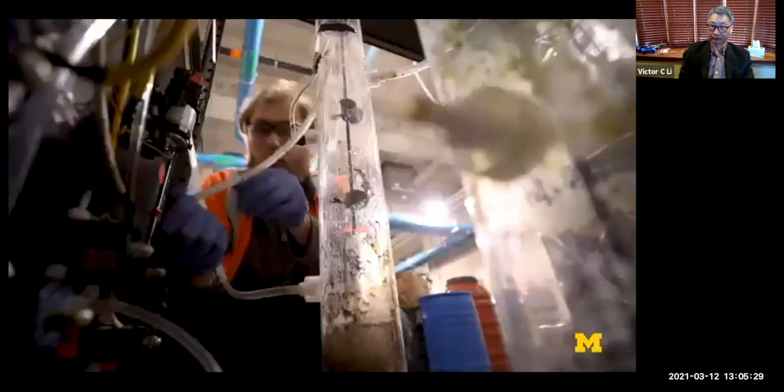Historically, we've pulled resources out of the earth, and then after we're done with the resources, we would release it back out to the environment. We started to realize that a lot of those wastes that we would release have valuable resources in them. Civil engineers and environmental engineers were designing a lot of those flows. I think we have a big role to play in how we might continue to shift the mindset and think about the future of what those flows might look like.

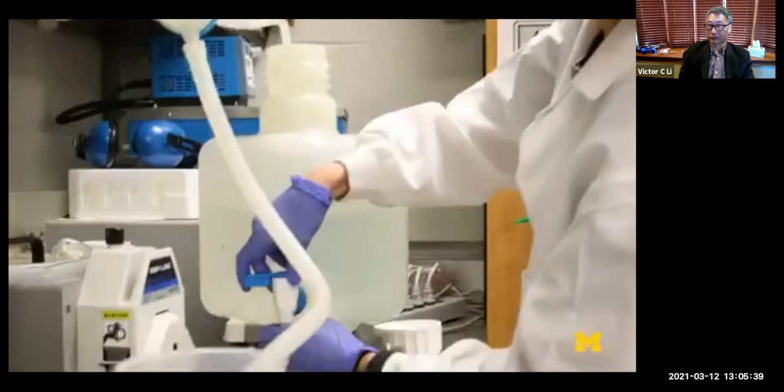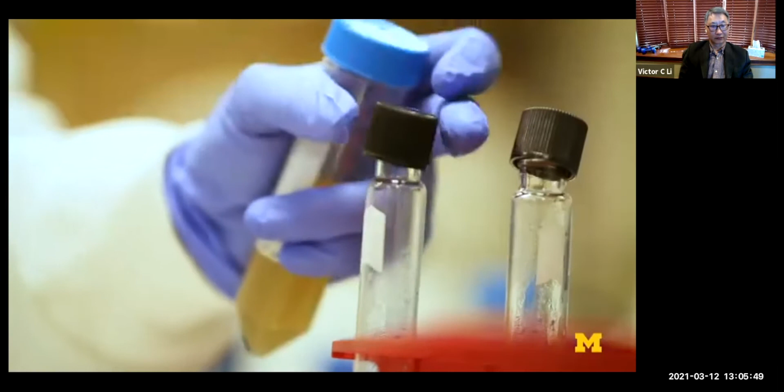One of the things I think we're doing that's really special is separating our wastewater right at the source, right at the toilet. The reason we're doing that is we can pull the nitrogen and the phosphorus out much easier before it's diluted in the wastewater, and then convert that nitrogen and phosphorus into really valuable fertilizer products.

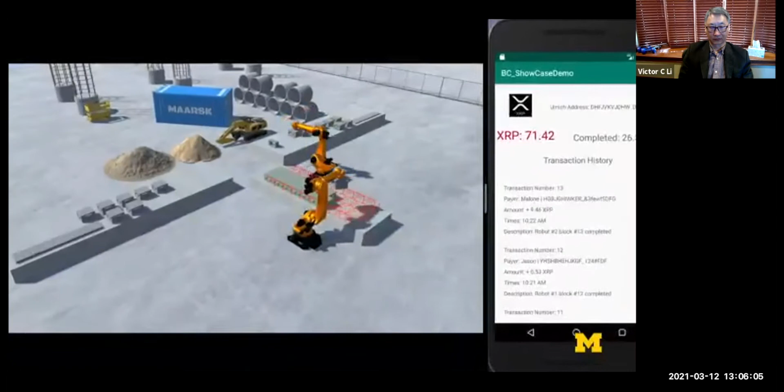Researchers in CEE are building RECO blocks. These are blocks built out of materials from carbon that's been sequestered, used to build structures. When the structures are done, rather than landfilling the material when we tear it down, we take those blocks and use them in new buildings, shaping the flows of these resources rather than a linear flow. We're making this a cyclical flow.

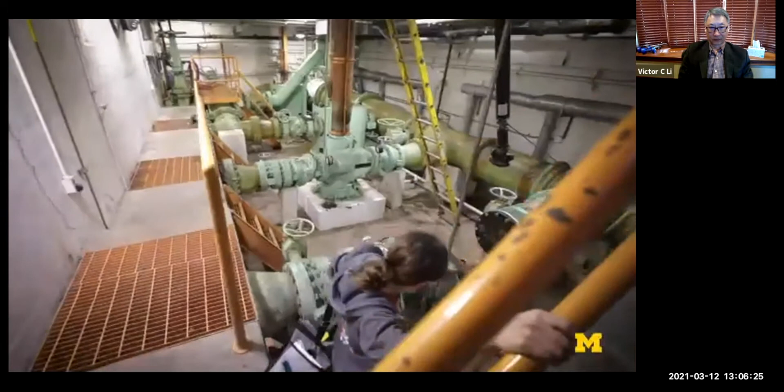In 50 years, if we're successful, this is just going to be in every activity we do as a civil and environmental engineer. How we're getting our resources, what we're doing with the resources, and where they go when we're done with them is going to be ingrained in our work.

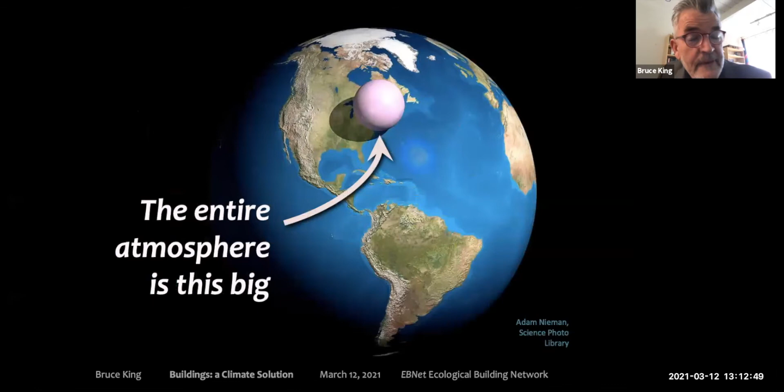This is how big our atmosphere is. If you scraped it all off the surface of the planet, it would be about this big - about 5-6 miles, about the distance from Battery Park to the middle of Central Park in New York. I'm sure there's something comparable near you. It's less than the distance across San Francisco, how thick the atmosphere is, where all the air is, where all the potable water is, where all the life is. It's really extraordinarily fragile. That's what we're working with here.

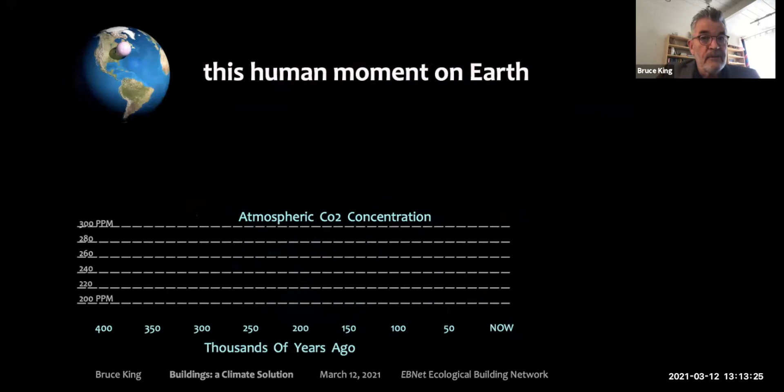In the 400,000 years that our species has been evolving away from the primate tree, the CO2 in the atmosphere has been bouncing back and forth between 200 and 300 parts per million. I'll bet all of you already know all this stuff, but it bears refreshing. Since the dawn of the Industrial Revolution, when we started burning fossil fuels, but especially since World War II, it's shot up past 400.

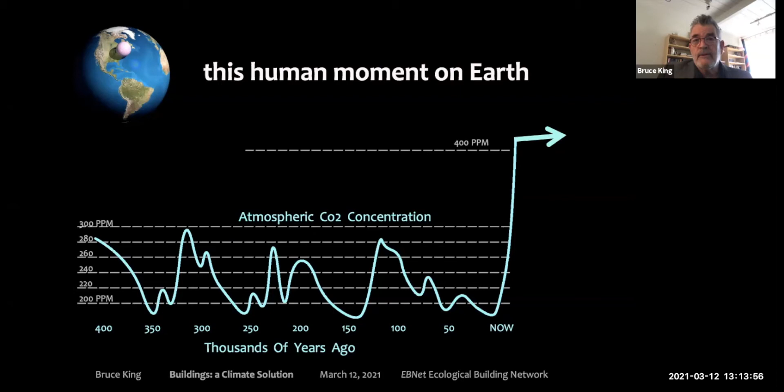Here's the interesting thing. If we somehow, by some miracle, could stop on a dime tomorrow, burning all coal, oil, and gas, the CO2 would still go up. The methane being released in the Arctic, the reduced albedo on the snowfields, et cetera, we'd still have a big problem. We have to draw it down. We have to get the global warming gases out of the air.

I specifically use the word drawdown because if you don't know about the book Drawdown by Paul Hawken, came out about 4 years ago, it covers the 100 easiest and most technologically accessible solutions to climate change available to us. It's full of surprises. It's a very interesting read. It's how we can actually turn this thing around and bring the carbon back home, to put it poetically.

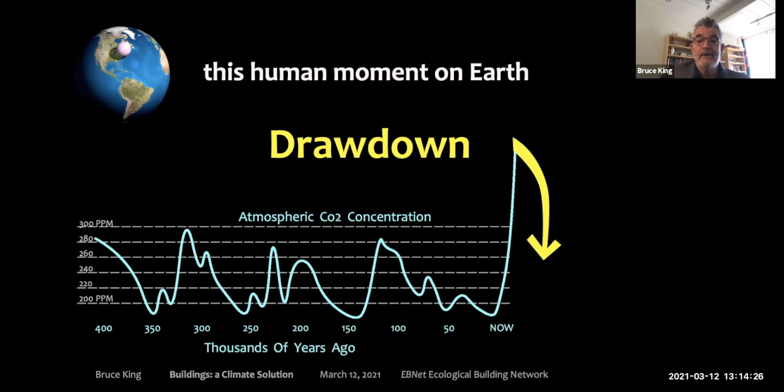One way to do it is the oceans. They're doing the job right now. By default, the oceans are absorbing the excess carbon dioxide in the air, which in a way is nice, but in a way is not nice. It's acidifying the ocean, it changes the pH, it's melting the coral reefs. It's bad for a lot of the life in the ocean.

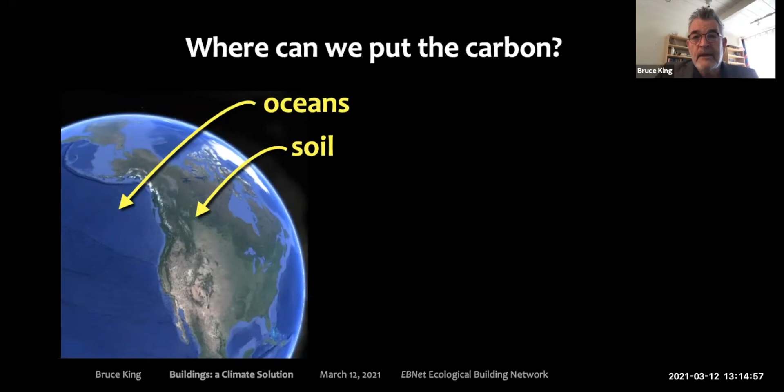Another place to put it is soil, and there's a lot of people working on how to do that. We've basically decarbonized a lot of the agricultural soil all over the planet by the way we grow food - tilling it and turning it over and releasing methane and changing the way the soil works.

So there's a big turnaround in progress there with the farming community, and a whole lot we could say about that, but I'll leave it at that and just say that buildings are the other big sink that we have available for putting the carbon. We can put it underground - there's problems with that, but buildings are a big one. By far the biggest artifact of human beings on Earth are our buildings and our cities, our infrastructure, all of that. And there's a lot of it.

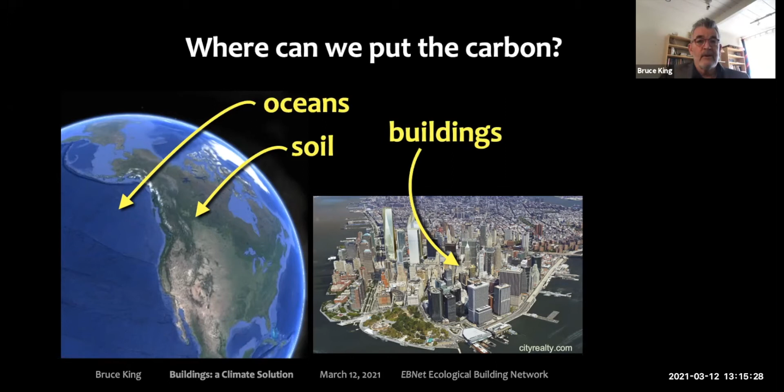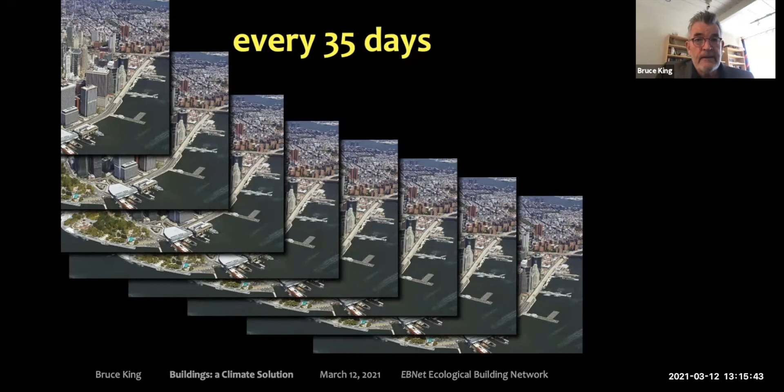We're building the equivalent of another New York City every 35 days right now. And that might not seem credulous to you in Michigan or here in California or anywhere in North America, because it's not happening here. It's happening in the Southern Hemisphere. It's happening in China and India and places like Cairo that I visited a year ago, where a city of 5 million went to 25 million in a couple of decades.

And it's a huge expanse of nothing but concrete and brick all over the desert. I never saw a shred of insulation in the week that I was in Cairo. And there's many, many cities like that all over the world now.

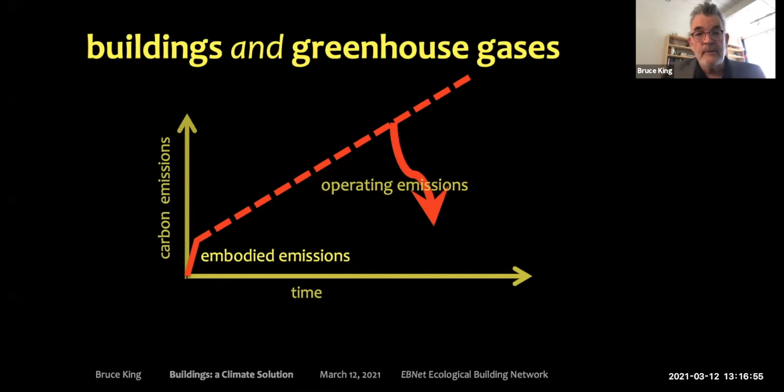Over the lifetime of the building, operating emissions typically dwarf the embodied emissions - far, far bigger - over 60, 80, 100 years. And so that's what we've been focusing on in the 30 years of the green building movement: reducing those operating emissions to much lower, even net zero, as you hear people talk about.

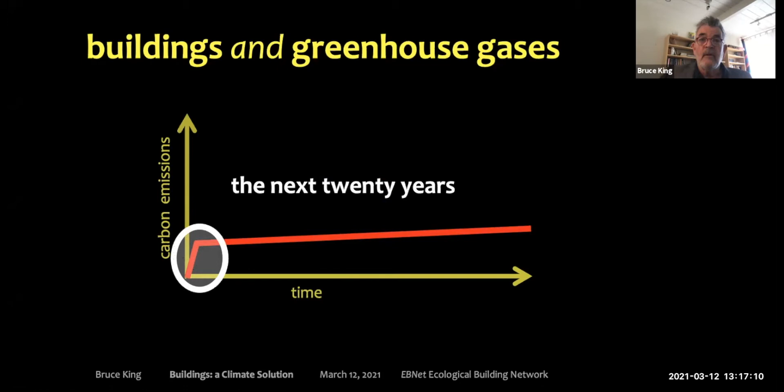But here's the thing - we can't think about 60, 80 years. We have to think about the next 20 years because we are in climate emergency. What can we do right now? This is triage. And when you look at it from that perspective of the next 20 years, it changes quite a lot.

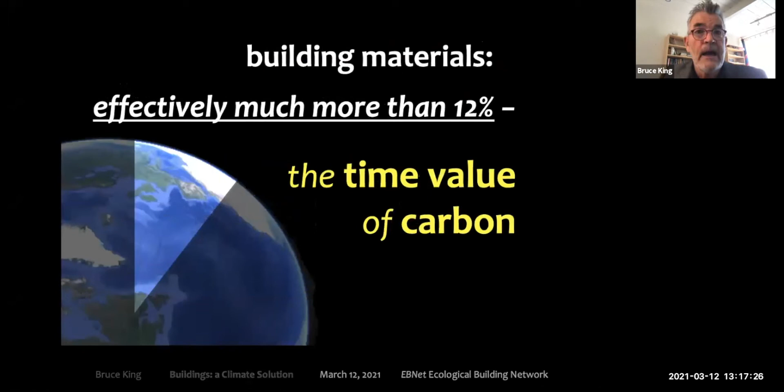Those embodied emissions, which are about 12% of global emissions, are amplified by the so-called time value - how long they're in the air. It's not just the height of that line above the horizontal, it's the area to the right of the line - how long the emissions have been in the air times how big the emissions are. And those embodied emissions are up there before you even move into the building.

So here's your big takeaway. If you remember nothing else, know that something you build this year, 3/4 of your climate impact, more or less, is from the materials you chose to build with.

And we haven't been paying attention to that up until recently. Now there's a lot happening. I'm happy to report on that to you.

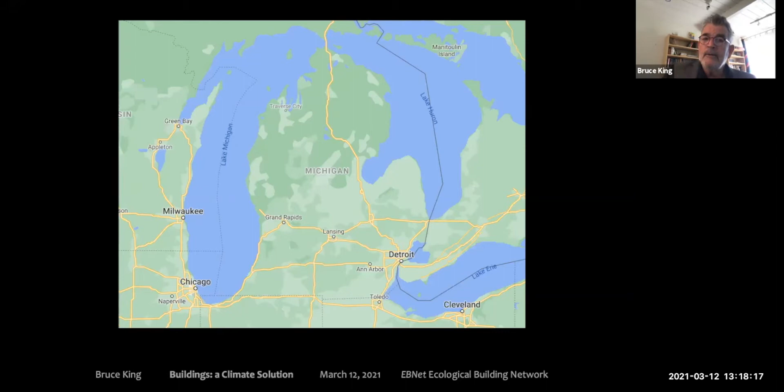But another analogy first. I was looking at the map and I can imagine that before the pandemic, you could fly around your part of the world. They probably had all sorts of little short hop flights between Detroit and Cleveland and Chicago, Milwaukee, and you'd go to the airport to get the 12:20 to Chicago, and you wouldn't expect to see a 747 pull up at the gate. You'd expect to see a little prop plane that would get you there in an hour, and that was all you needed for the 20 people who are on the flight.

Nobody would use a 747 for that. But metaphorically, that's exactly what we've been doing in construction - using a 747 for everything. The way we make concrete, the way we use metals, the way we design our buildings, as if there's all the fossil fuels in the world and all the room in the world to throw stuff away, which just isn't the case.

Concrete's the big one. 8% of global emissions are attributed to the making of concrete worldwide. How does that come to be? Concrete's a very low carbon material - pound for pound, it's a very low carbon material. So how does that happen?

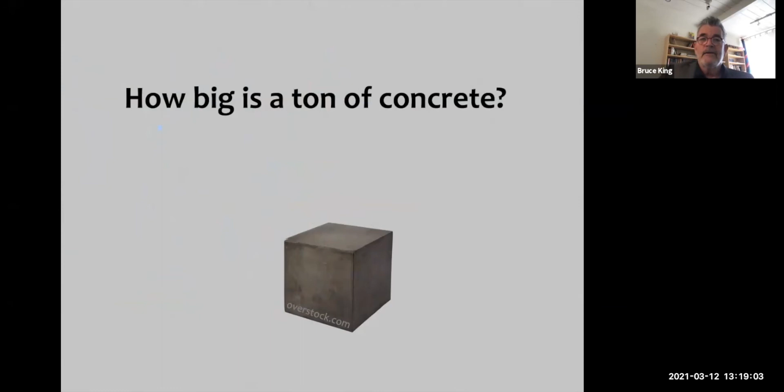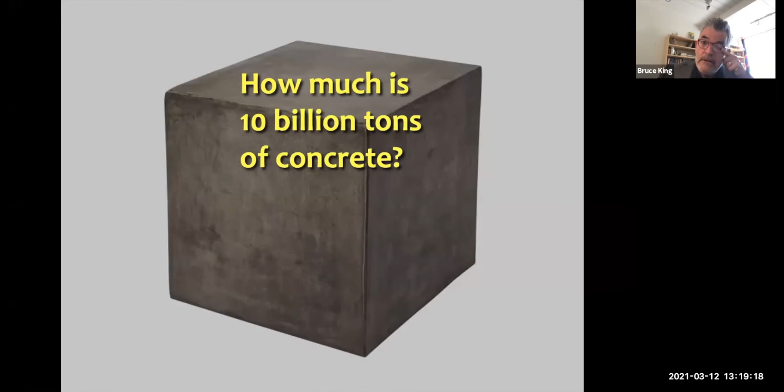A ton of concrete, if you work it out, is about desk height. You make a cube, you get about 29 inches on a side. But the world makes 10 billion tons of concrete every year. How big is that? I did the math about 6 or 7 times because I couldn't believe it. But you get a cube that's about a mile on a side - it's 5 times the height of the Eiffel Tower. And that's how you get 8% of global emissions. 10 billion tons of anything is going to have an impact.

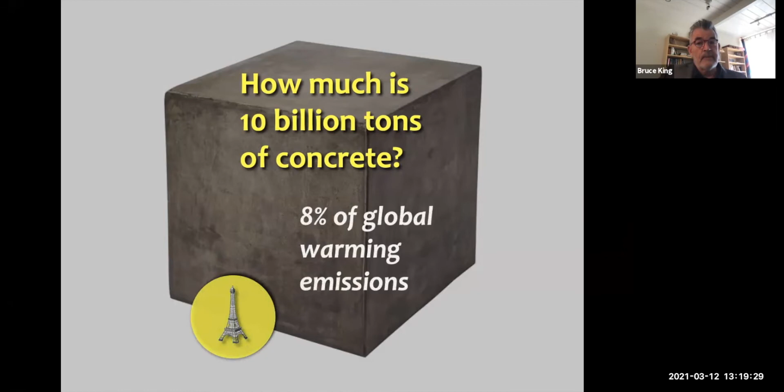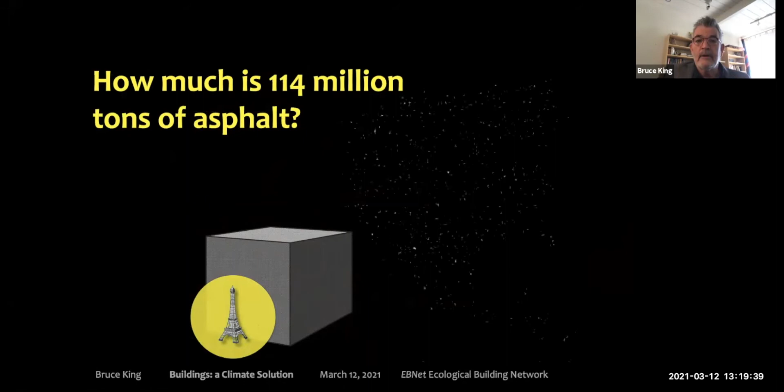That other concrete, asphalt, are all our streets and highways, same sort of deal - a lot of it everywhere. We've now covered the surface of the earth, the equivalent of the size of Texas or France, with asphalt and buildings.

So make low carbon concrete, right? Reduce the carbon footprint of the concrete. It actually isn't that hard, and I speak from 42 years experience as an engineer. Virtually every concrete project I've had, I've gotten much higher strength concrete than I needed, much higher carbon concrete than anybody needed. And there's a lot of reasons for that, and I'm not blaming anybody - it's just the way we've been operating. We've been using a 747 to do everything when we could have used a Piper Cub.

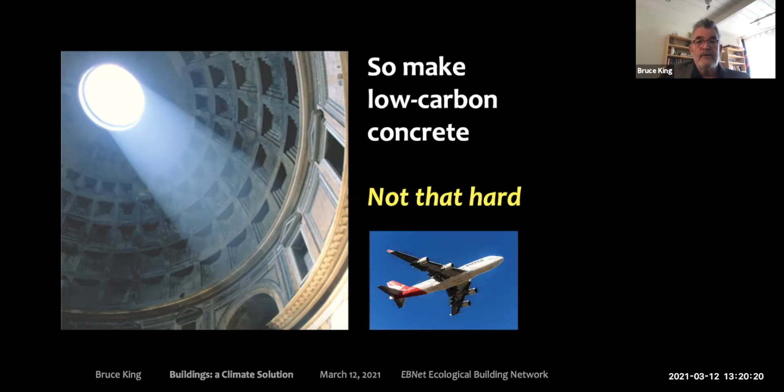So out here in Marin, we decided to do something about that. Enough with the 747s. We wrote a low carbon concrete building code amendment, and we passed it into law a year ago. And then the pandemic started, so it's hard to say how much effect that's having. But it's being replicated now in a lot of places, and the idea is catching hold because people in the industry know that we're basically making much higher carbon concrete routinely out of habit than we really need to do to get strength, durability, all the things that we want out of concrete.

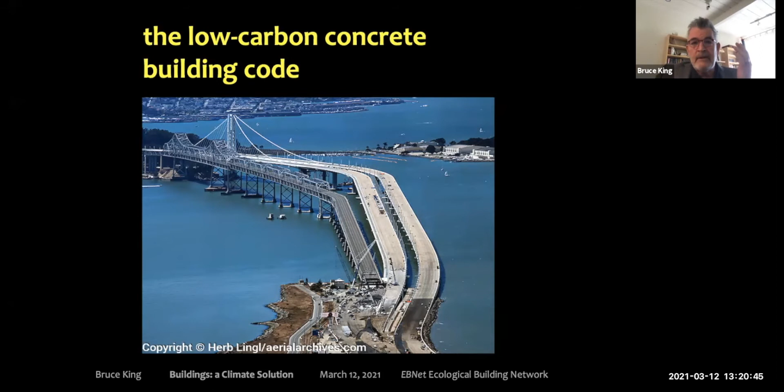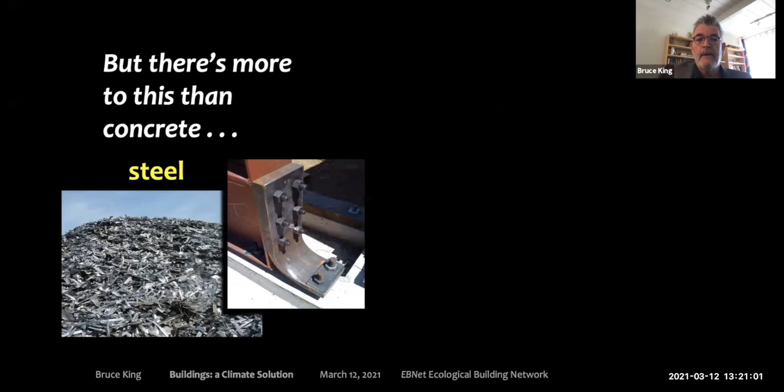But there's a lot more to this than just concrete. Steel is the other big one. 7% of global emissions are attributed to steel, half of which goes into buildings, rebar, wide flange shapes, all of that. So steel's the other big target, but there are others.

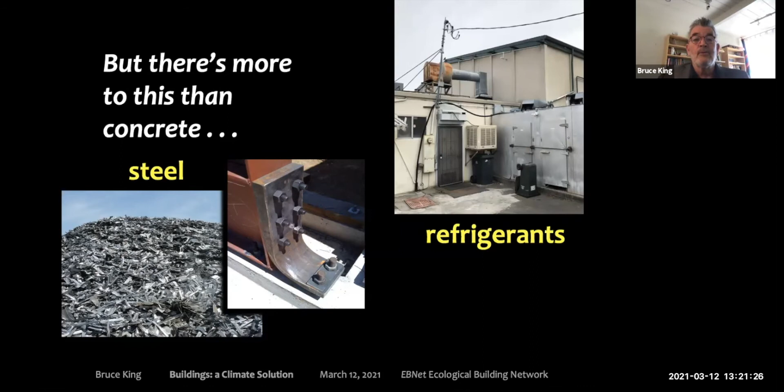One of the surprising ones is refrigerants, the fluids, the hydrofluorocarbons that go into air conditioners, freezers and refrigerators, thousands of times more potent than carbon dioxide. This picture I took at my local strip shopping center is the same as behind any convenience store or shopping center. A bunch of this stuff, dripping away onto the pavement with an enormous effect on the climate.

These people are moving out of the country into the cities, into the new cities in Asia that you hear about. And if they're lucky, they get enough money to buy a window-mounted air conditioning unit and plunk it on the window, and there's their HVAC. That's about as inefficient as it could possibly be. These aren't insulated buildings, and they're dripping away from the moment they're put in.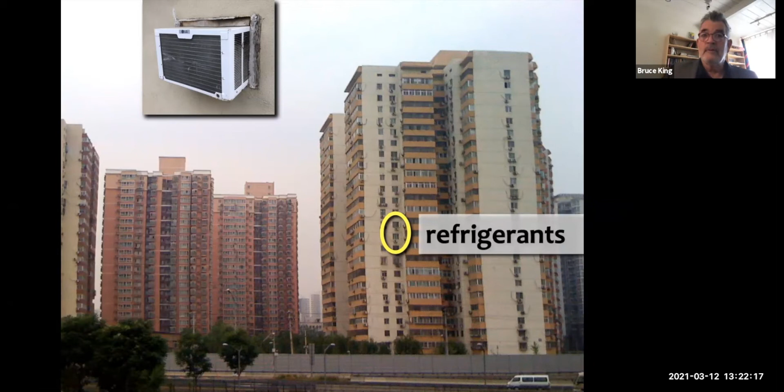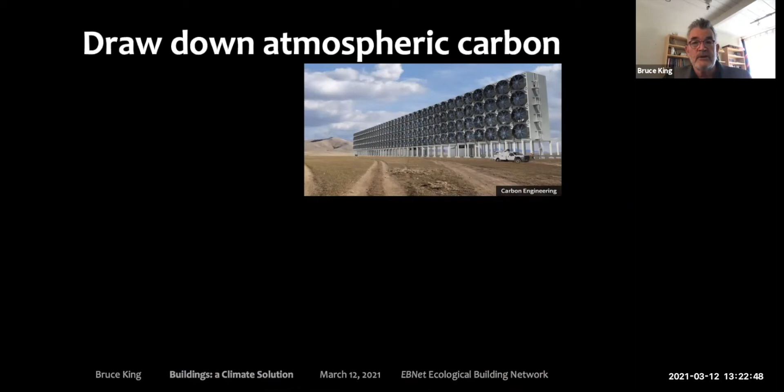So how do we draw carbon down? We can reduce the emissions, but we also need to find ways to draw it down. You see lots of pictures of things like this, devices that pull carbon dioxide out of an airflow. This one I see all the time, and more effective are the ones that actually get mounted straight on the smokestacks of power plants and cement plants, where the carbon dioxide is much richer and it's a better place to try to gather it.

There's also natural ways, right? Trees and the crops we grow are gathering carbon all the time. I was one of those who, until not so long ago, was poo-pooing the big machines you see in the upper right there because, oh, well, don't these guys know about trees? Well, they do know about trees, but the thing is, trees don't give us gaseous carbon. This is a whole other sidebar I could spend another hour on, but we do need these machines that somehow draw the carbon out of the air to give us gaseous carbon.

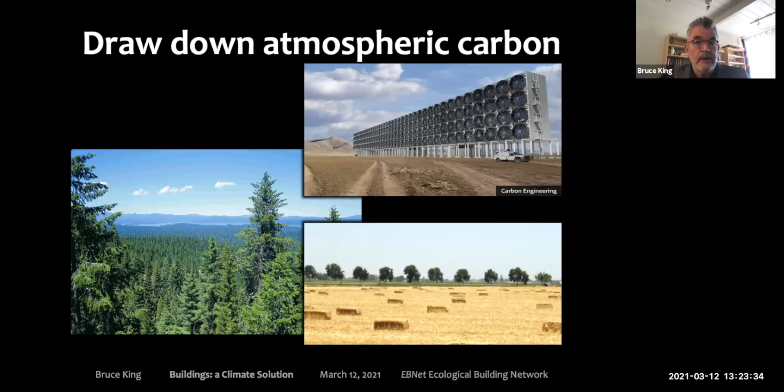Because that proves to be essential to a circular economy and shaping resource flows, that carbon can be used to make concrete, to make plastics, to make fuel, make all sorts of things. So we have to gather the carbon in a way that we can reuse it. But the plants are doing all that a lot too, and we can use that. They eat sunlight and carbon dioxide, and turn it into carbon and store it in the soil. That's the basic process we need to start working with.

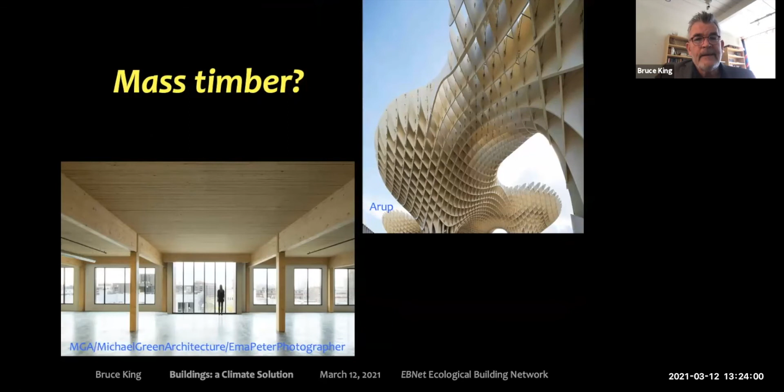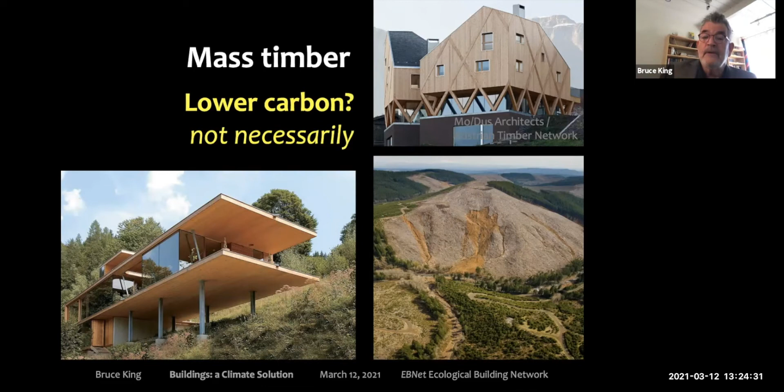Mass timber, you hear about a lot. It's sort of the poster child for the new green architecture, for climate-friendly architecture. And it is, and it can be, but it isn't necessarily, because if you're not sustainably harvesting the lumber, if you're wrecking the forest, you're really not doing anybody any favors. This is a sustainably harvested forest you see in the picture there, by the standards set by the industry, which is obviously not that stringent. There are better standards, and if you use lumber by those standards, you're much better off. You can get mass timber now in North America, and I think also in Europe, that's made with FSC, Forest Stewardship Council certified lumber.

That's the answer on that one. But really the bigger future, I think, is in straw. That is what we throw away. We grow our food whether or not we're going to use the straw for anything or not. And we grow a lot of it, 2 billion tons of straw. If you turn that into the density of a typical straw bale, it's about 1.75 miles on a side, a cube that looks like that. And half of that is carbon. If you turn that into building products, which we know how to do, you could basically negate the emissions from all of that concrete.

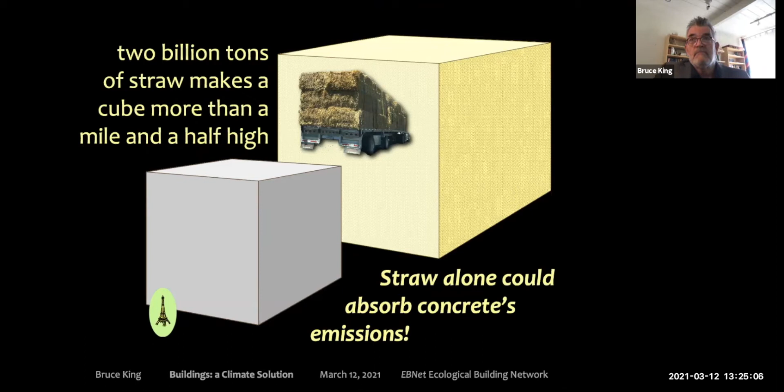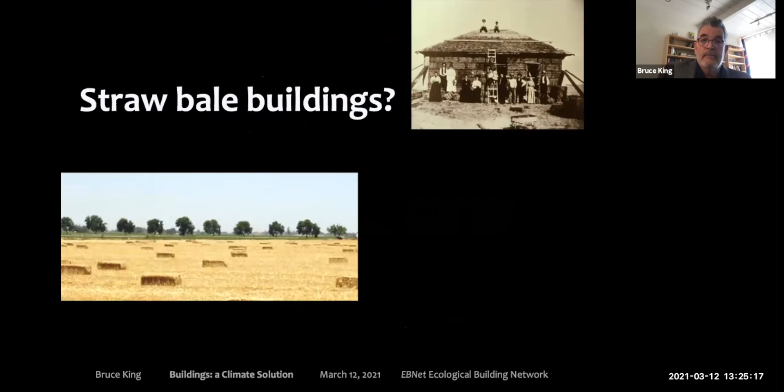But I don't mean straw bale buildings, though they have a certain charm. And my little moment of jingoism for America.

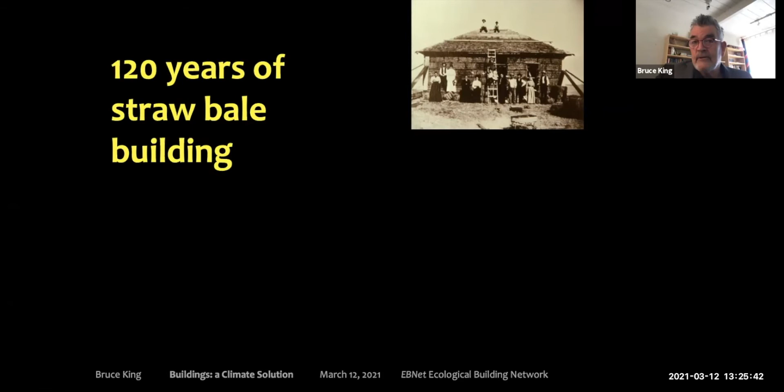Straw bale construction was invented on the plains of the United States, out in western Nebraska, where settlers had nothing else to build with, no stone, couldn't even cut the sod to make sod houses. But they had newly invented baling machines, and they invented the straw bale. Some of those buildings are still there 120 years later. Straw bale construction started a revival 30 years ago, and now it's spread all over the world, just like democracy and jazz, our little American gift to the world.

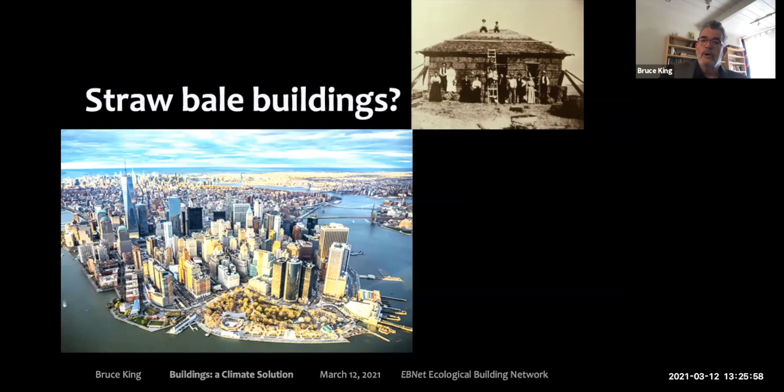But you're not going to make a New York City out of straw bales. So what could we do? Well, straw bale 2.0 - there's a world of straw products coming online now, and some have come and gone, but some are going to stay here: straw blocks, straw panels, straw lumber, straw sheathing.

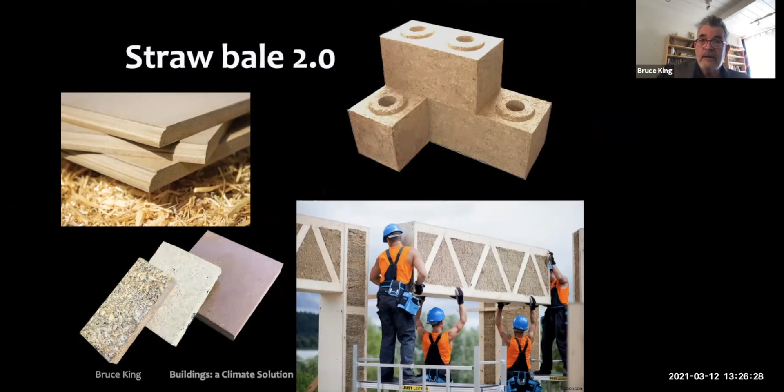The upper left is a panel company that just went into operation here in California. The lower right is a fantastic company in Europe, now starting to get a toehold in North America, called EcoCocon. They make very carbon intensive, meaning carbon storing, buildings. It's a great technology, and all sorts of other plant-based insulation and sheathing systems are available now.

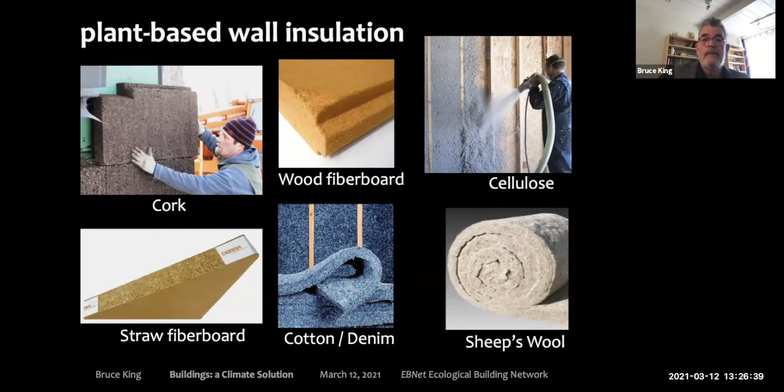People say, well, what about straw? All these things, they're going to burn, right? They're going to rot and they're going to burn. Well, if you do it wrong, yes, they will.

But one of the worst fire disasters anywhere on Earth in the last 20 years was the Grenfell Tower. Some of you may remember this, about 4 years ago. And that wasn't straw - that was the plastic foam that everybody thought was so safe. It was polyurethane foam and polyisocyanurate. It was a bad design, basically. Bad design will wreck anything, no matter how good your material is.

And really good design - you can make a good house out of cardboard if you really know what you're doing. So design is kind of important. You engineers, they count on us to know what we're doing here. And these guys didn't, and a lot of people died. But it wasn't because it was straw or cork, it was foam.

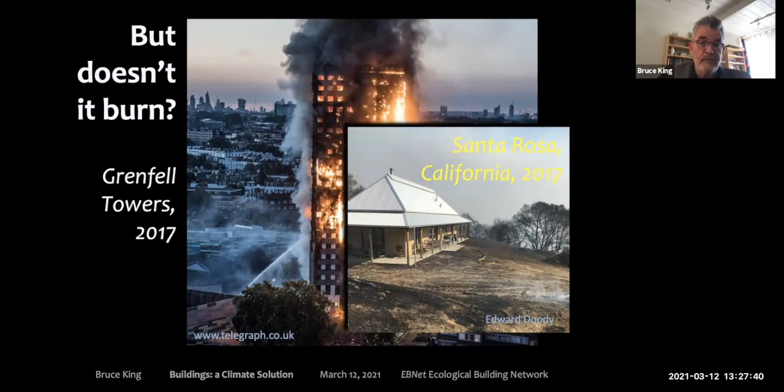This is a straw bale house that went without problem through one of the recent wildfires in California, when everything around it, as you can see, burned. I'd much rather be in a straw bale house than a wood frame house in these wildfires.

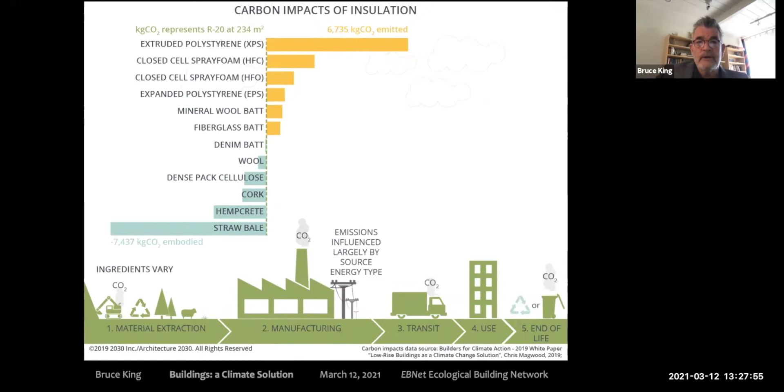And all these insulation systems that are available to us now are mostly really high carbon. Remember my talk about the refrigerants and the stuff drip, drip, dripping? Well, it's more or less the same kind of chemicals that we use to make our extruded polystyrene and our styrofoam and those kinds of things. Whereas we can use natural materials, cellulose-based materials, to do the same stuff.

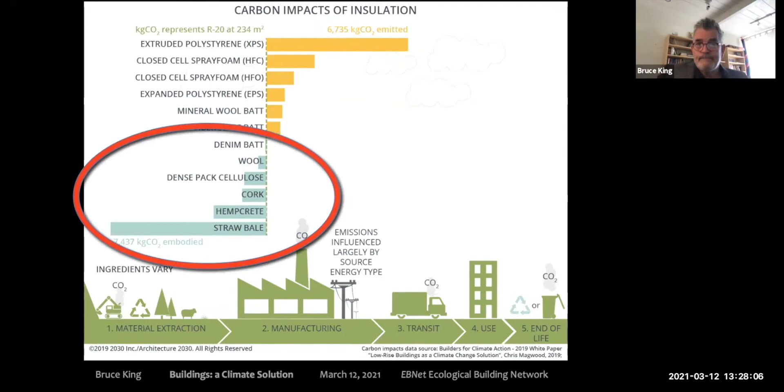Bamboo is having a renaissance. You can build really elaborate architecture with bamboo, but you can also make really ordinary stuff. Great company here in California, Bamcor, is learning how to turn it into panels, so it works with the rectilinear architecture that we're all used to.

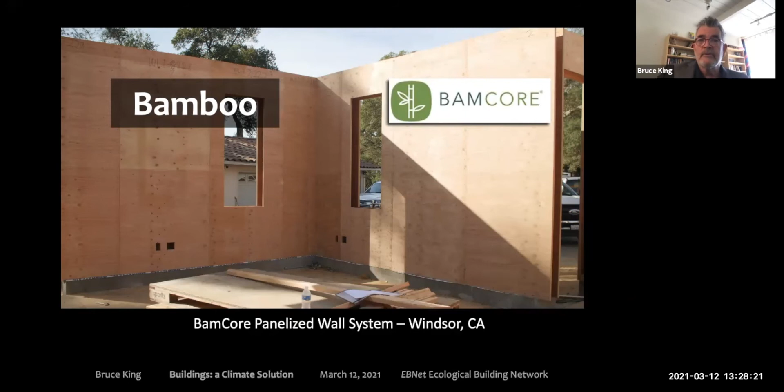Hempcrete's another big one coming online, now that the barriers against hemp - mistaking it for cannabis or making jokes about all that - are going away. Hemp is a fantastic material, and we're growing more and more of it. There's all sorts of stuff - clothing, medicine. And once you've taken everything out that you want for clothing and medicine and food from hemp, what's left are these tough fibers that are really great for building with.

You mix them with a little lime or a little bit of cement, and you get a doughy substance that you can pack into a wall or spray or whatever. The French started it. They've done all sorts of buildings now. It's all over the world now, and it's just arriving in the USA. The US Hemp Building Association just started last year, I think, and already has hundreds of members. Great stuff - doesn't burn, doesn't rot, insulates.

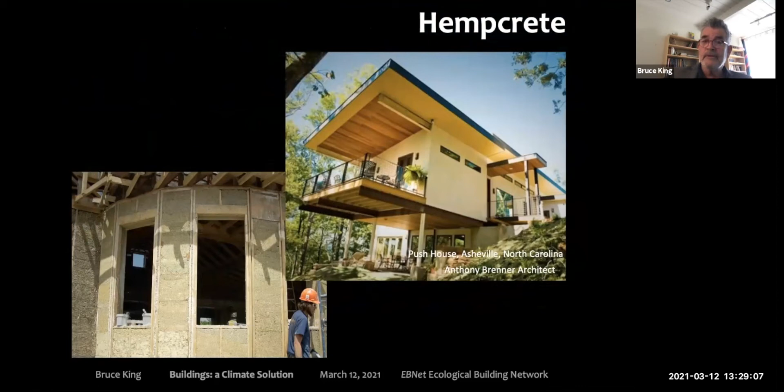The big, longer future, I'm sure, is with what I call the little ones - microbial life, bacteria, fungi, and, well, what else am I thinking of? You see things like Ecovative that makes insulation out of basically mushrooms - spray it in with a little bit of cellulose and it fills up your wall cavity. Or Biomason in North Carolina, where a wonderful woman has invented this bacteria-based concrete that gets very strong very fast. So far, it has to be done in the factory, it can't be done on site, but still very exciting.

I think she's starting to supply the Department of Defense with lots of cool stuff with life forms that are too small for us to see, but can do all sorts of amazing stuff for us.

When you get into this stuff, you have to start learning the accounting systems by which we do it. I won't try to unpack all of this, but you get product category rules. If you're going to say something has a carbon footprint, you have to know by what method and with what information you're going to make that claim. That's a fast evolving field, by no means mature. We're sort of laying the track as we go here, but we're getting a sense of how do we measure these things, how do we compare any two things, how do we know what the carbon footprint is, how do we know where we can improve things. Until you can count it, you can't measure it, or you can't improve it. So it's a bit of the Wild West, still very much something in development, but it's going to be part of all of your lives who are involved with the built environment.

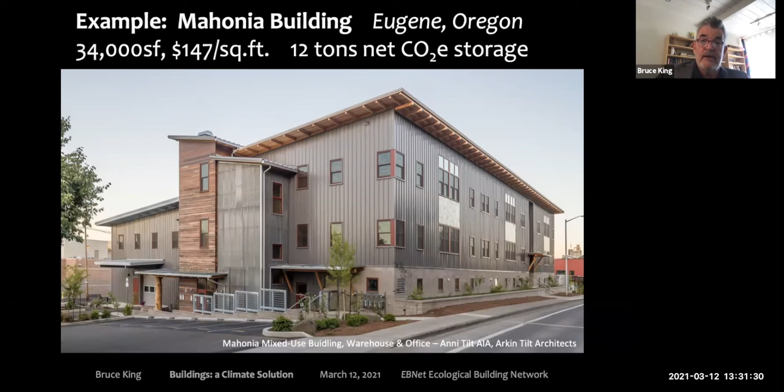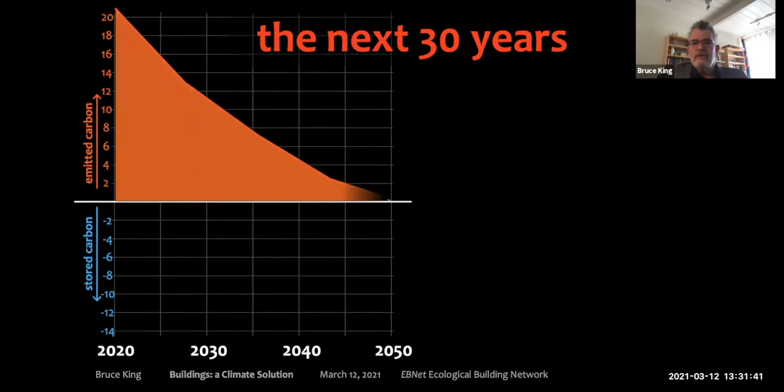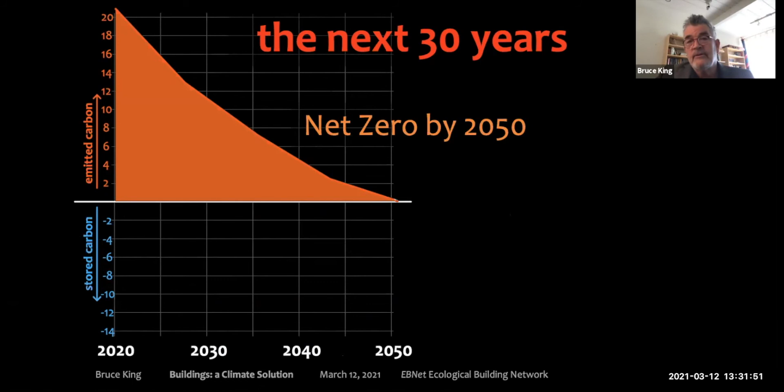For the next 30 years, what's it going to look like? Well, what you hear most often is zero by 2050. It's a favorite goal that you hear announced all the time by cities, counties, countries, corporations, trade associations. And it sounds pretty good, and it is pretty good, better than nothing. Sometimes I fear it's a little bit of rearranging the deck chairs on the Titanic kind of thing, like keeping everybody busy and kicking the can down the road and not really doing anything.

So we have to be held to task. But I don't say that to blame the CEOs of the corporations or the city councils or anybody else. We're all guilty of not seeing the big picture often. We get absorbed in our own little lives and our private little dramas, and we don't remember that we are in a climate emergency, but we are.

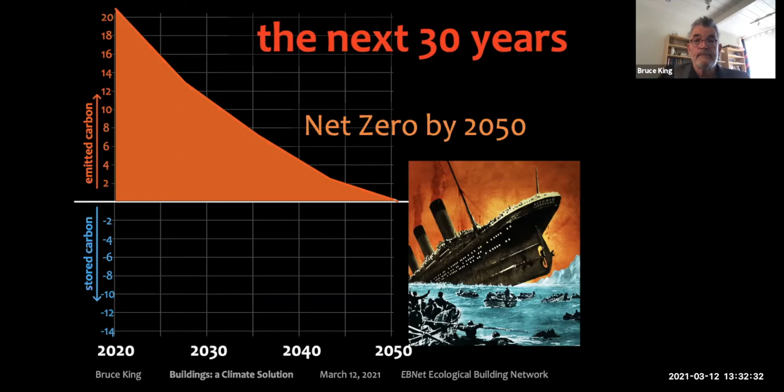So what can we do about it? We who work in the built environment have something to do with resource flows. Well, the embodied carbon can look like this. These numbers on the left are emissions per year, and the built environment is about 20 gigatons of emissions per year.

Embodied carbon is about 6 gigatons globally per year. What if we were to just bring that down and get to the point where, 15 by 50, we were absorbing 15 gigatons per year? That's the goal we have to aim for. Not just net zero, that's not good enough. That's just not going to be good enough.

We in the built environment can do all sorts of stuff I'm sure that not I, and not any of you right now, can even imagine, but in a few years' time will just be obvious how we can use buildings in the built environment. Everything, our highways, our power plants, everything we build can be a place to absorb and store carbon.

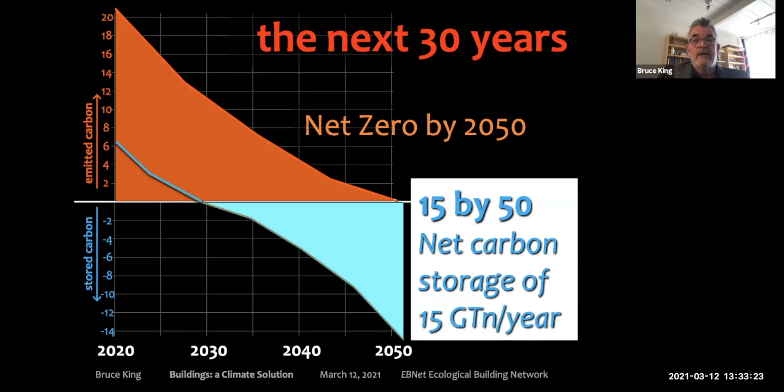For you as a person, and for you as an engineer, for you as anybody, whoever you are, reduce your carbon footprint as best you can, for sure. But don't freak out about it. You can only do so much. You can stop eating meat, you can stop using plastic, and you can only do so much.

The thing is, make your handprint bigger. My old friend Greg Norris said it's as simple as that. Just make sure your handprint is bigger. Educate people, start a recycling program, be a better engineer, be thinking about this and do what you can to have a positive impact for the climate. That's the job in front of all of us. This is my book, a whole bunch more about all of this if you should care to read it, and I thank you for your attention.